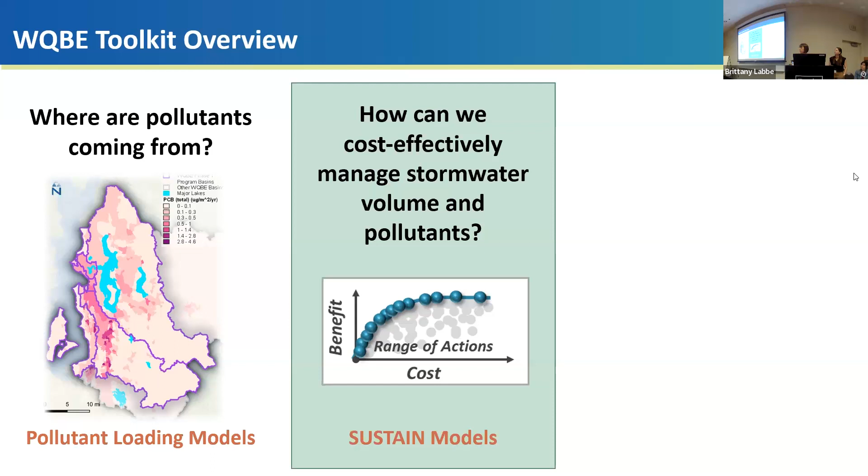And then we are looking to connect the possible actions we could take to the outcomes we could expect for people, salmon, and orca. So we have causal models, basically the cause and effect models that are helping look at what are all the different factors that are affecting how people interact with water. So are swimming beaches open? Can people safely harvest shellfish? Can they safely eat fish from our waterways? And then also looking at how water quality issues feed into the larger threats that are facing southern resident orcas and our Chinook salmon.

Today, we're going to really be focusing on the stormwater models. So you're really going to hear us talking about SUSTAIN today. And one of the key things about SUSTAIN is it's kind of different than the previous talks we had. They're getting really on the ground, where you can know a lot about your site, really dig in deep. This is trying to do higher level planning, and King County is really vast.

And so we're trying to, at a high level, look at what sort of goals can we set for our stormwater management? Can we estimate the outcomes we could get from a larger scale stormwater program, estimate what the costs would be, and then start to drill into informing the specific actions we would take on the ground. But it is higher level planning work that we're doing. And I'm going to pass it over to Stephanie to talk more about it.

Thanks. All right, thank you. Can everybody hear me okay? If I don't use a microphone? Okay. I'm going to set this right here.

All right, show of hands, has anybody heard of SUSTAIN before or used SUSTAIN before? Knows what it is?

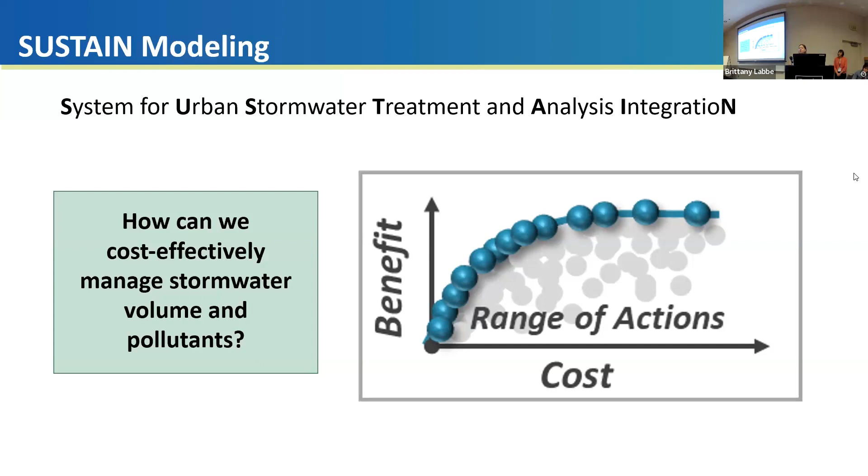So Sustain has been around since about 2014, stands for the System for Urban Stormwater Treatment and Analysis Integration. It was developed by or with the EPA, and it really answers the question, how can we cost effectively manage stormwater volume and pollutants? So a cost benefit analysis almost. And cost is something we're all probably pretty worried about.

And I want to talk a little bit about what goes into Sustain. How did we build the Sustain model for King County? The building blocks for Sustain are what we call actions or stormwater BMPs. I'm going to use the terms interchangeably. And so we have each of these actions or BMPs that we've developed. We've got green stormwater infrastructure BMPs, like rain gardens, there's gray infrastructure, as well as regional stormwater parks.

And each one of the BMPs that we've developed for our modeling purposes has three components to it. So design, cost, and performance. So performance is, what sort of pollutant reduction do we expect out of this type of BMP? And then cost. So we're looking at a 30-year life cycle cost. What does it cost to put it in the ground and maintain it for 30 years? And then also design, how big is it? And we're looking at a retrofit situation, right? So what are the sizes of the BMPs that we're talking about putting in?

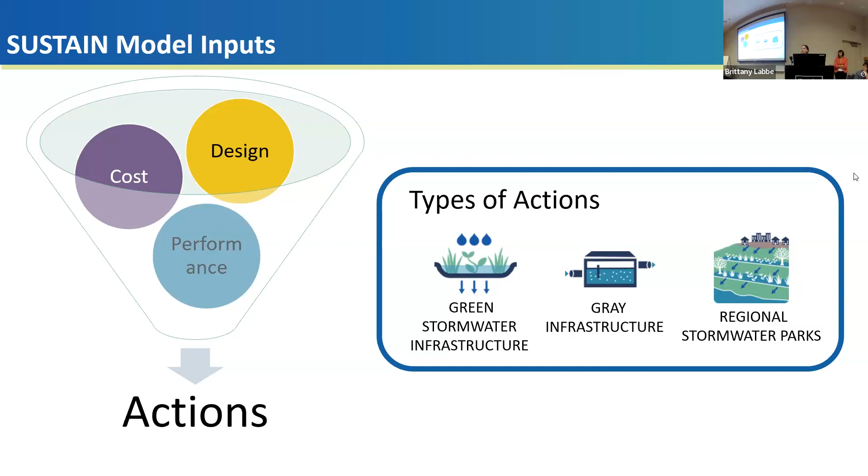And so all of these actions fit into one of three categories that we call programs. We have a GSI Green Stormwater Infrastructure Incentives Program. We have a Roadway Stormwater Treatment Program and a Regional Stormwater Treatment Program. So these three different programs. And the programs have a set of assumptions about them as well. So there's action opportunity. Where can we put the type of BMPs that we're talking about? So for example, in our GSI Incentives program, we have rain gardens. And in our model, we said rain gardens can only go in low density residential areas.

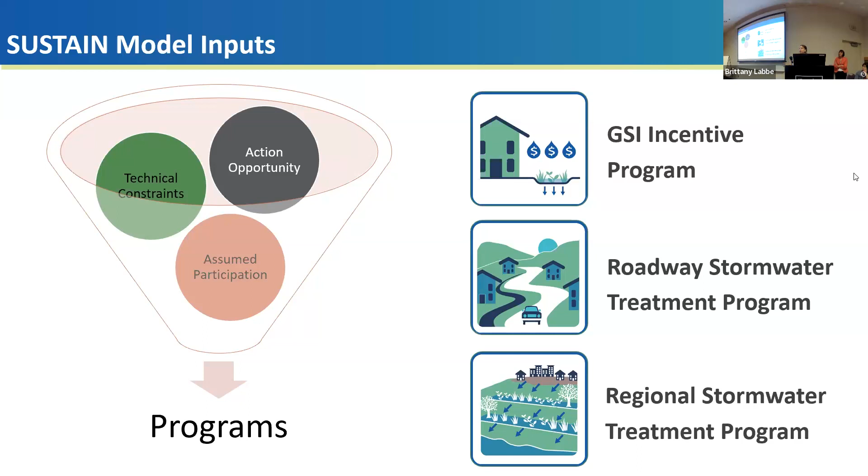And then we also have technical constraints. For example, for our roadway treatment program, we might not have space for some of the different actions that we're talking about, and we have to take that into consideration too. And another really important part of each of these programs is assumed participation, right? So if we go back to the rain gardens, we know that not everybody is going to want to put in or maintain a rain garden on their property. Or if we're looking at a regional stormwater treatment program and we want to put it on private land, people might not want to sell their property to us. So those are all considerations that go into the Sustain modeling.

All right, and so this graph looks kind of confusing at first. So I'm going to walk you through how to read it, but this is a Sustain curve or a cost effectiveness curve. This is for the Green Duwamish Basin. It's the roadway treatment program. We've optimized the model for sediment reduction. So we're looking at % reduction of TSS along the x-axis here along the bottom. So you can see we go from 0 to about 2.2%.

On this y-axis on the right, we're looking at capacity in acre feet, and that corresponds to these color blocks right here. And then finally on the left y-axis, sorry, we're getting it backwards, that's cost, and the cost corresponds to this red line right here. So these color blocks correspond to different BMPs that match to the capacity axis. So we can see bioretention in this teal color, media filter drain in this darker blue color. So that's how you read a graph like this. You can also see a handful, it might not be super clear, of other actions that are sort of lumped in the top right there, like high rate underground filter and bioretention planter as well.

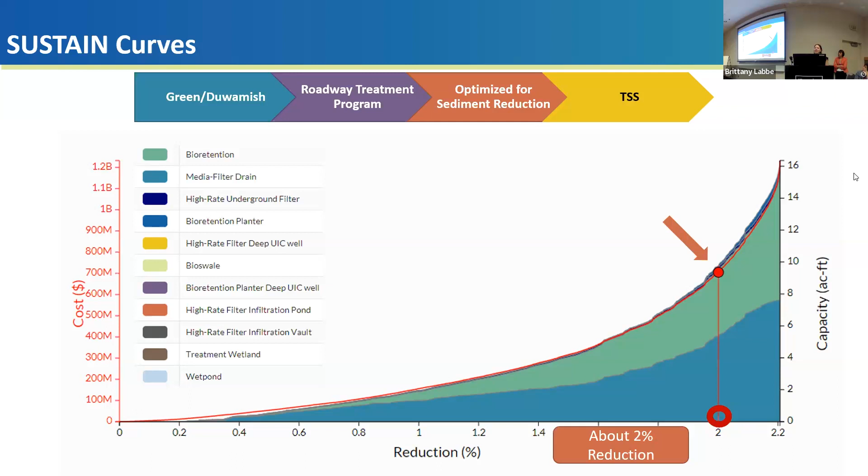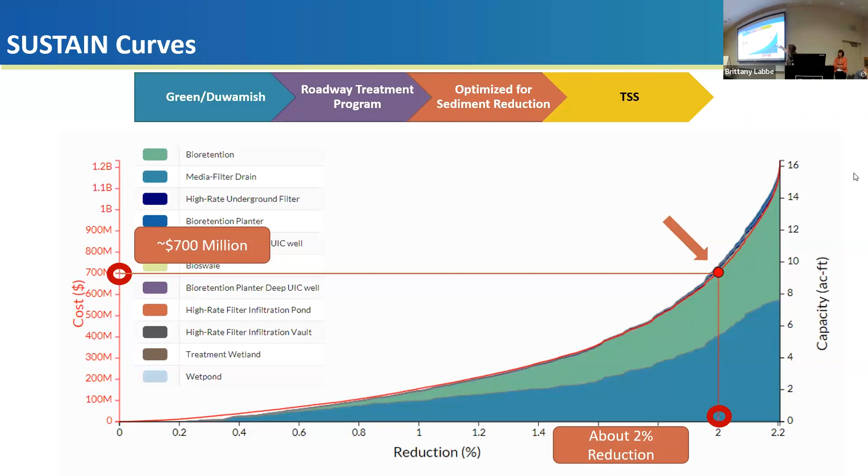And so with Sustain, one of the things that you do is we take what's called a slice or a package. So we can pick a point along this cost curve, and we can see that if we go straight down to the x-axis, at this point we get about a 2% reduction in TSS for the entire Green Duwamish Basin. And then if we look along to the cost axis, we can see that this would cost about $700 million in the Green Duwamish to implement this program. And by implement this program, I mean all this amount of media filter drain, this amount of bioretention, as well as these other little slices up at the top that are a little bit more difficult to see.

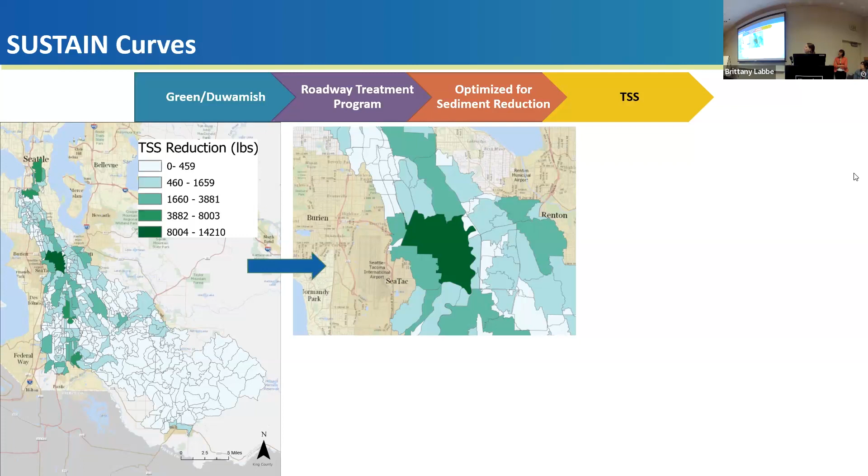So this is a heat map of TSS reduction for this specific package. And we can zoom in a little bit and we can see, maybe we're trying to prioritize our projects, or where do we start if we want to hit this goal. And I might zoom in on this darker green sub-watershed.

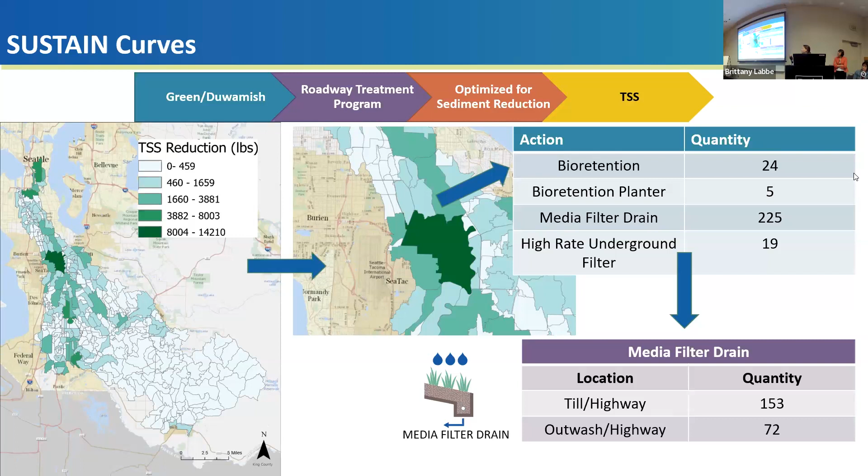And in that sub-watershed, Sustain is telling us to get this reduction that we're looking for this entire 2% program in the Green Duwamish, we would need 24 bioretention actions and 5 bioretention planters, and then 225 media filter drains. And so we can even break that down a little bit further and look at almost where, so it doesn't site the actions, but what it does tell you is these are most effective near highways and till soil, for example.

All right. So from our Sustain modeling, we modeled these 3 different programs across 5 basins in King County. So all the basins with major receiving waters in King County. And looking at all the programs across all the basins, there were 3 key takeaways or main findings that we had. The first is that the regional stormwater parks are worth the investment. And again, with that whole cost thing, that's sort of a scary statement.

And this is the Manchester facility in Kitsap County, and you can see it's a really nice green open space. So we've started calling them stormwater parks instead of stormwater facilities, because facility sounds not as cool as this picture looks. And so this is the Sustain curve for the regional facilities program. Again, it's the Green Duwamish. We've optimized it for sediment reduction. And you can see that for about $500 million, we can get a 42% reduction in TSS.

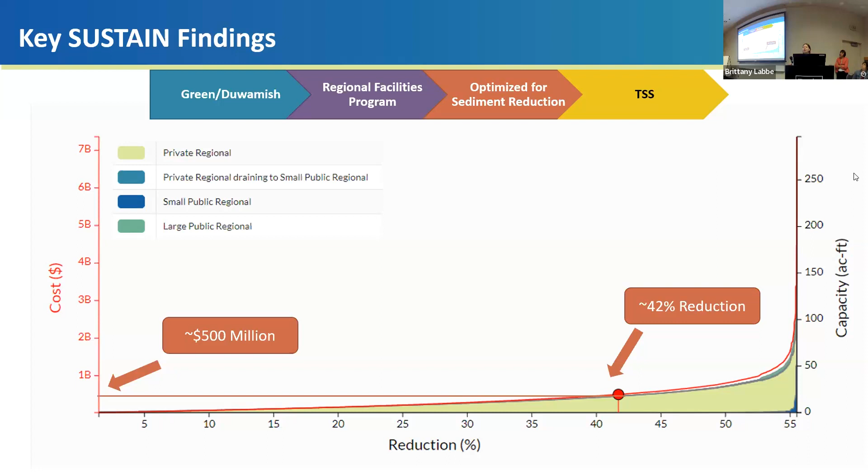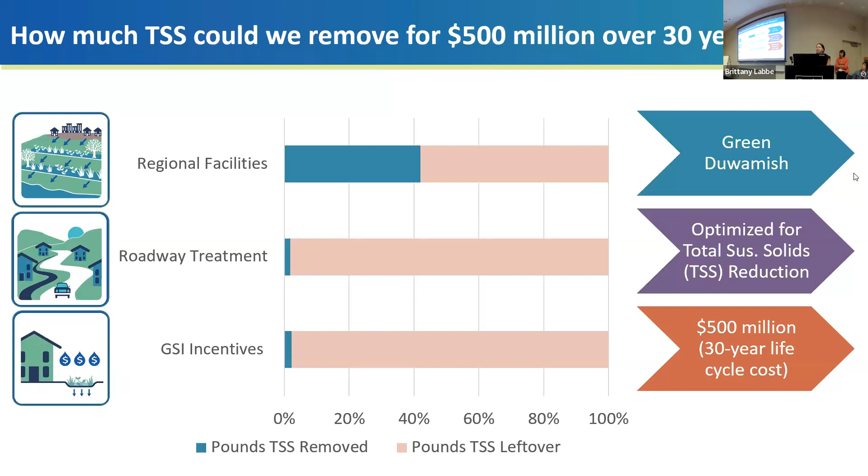And if you remember back to what I was talking about with the Roadway Treatment program, for $700 million, we could get a 2% reduction. So this is an order of magnitude larger. And so again, just comparing across the programs for this $500 million package, what is the percent reduction that we get? Regional facilities is over 40%, and Roadway Treatment and GSI Incentives are less than 10% each. And this is a pretty significant finding, and we were surprised by it.

So with that, I wanted to talk about some limitations. So we haven't looked at flow control yet. This is just for water quality, and we acknowledge that flow control might look different if that's a big priority. When we did this modeling, we initially only looked at public facilities, and we found that that wasn't really hitting the mark. So it's really important where we're siting these regional stormwater facilities. They have to be at the bottom of the sub-watershed or the bottom of the catchment to be really effective.

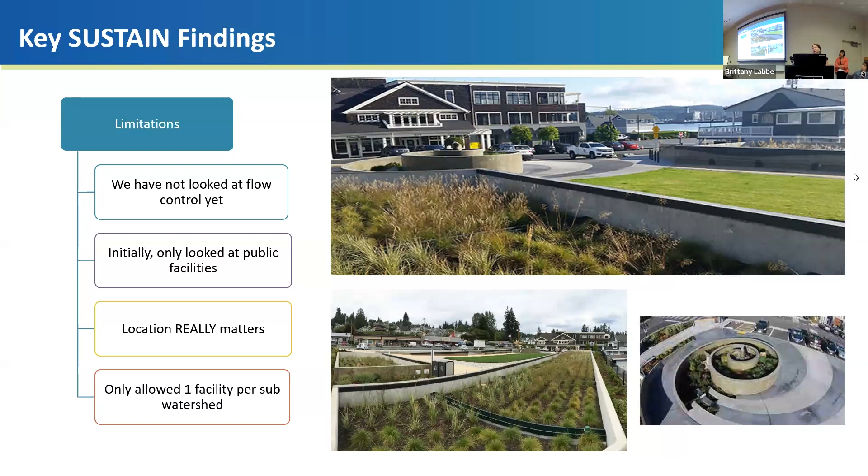And in fact, these facilities are so effective, Sustain wanted us initially to put multiple in one sub-watershed or one catchment. And we realized that's probably not feasible. It's hard enough to site these as it is. So we limited it, in our modeling, to one facility or one park per sub-watershed. So these are just some modeling constraints that we wanted to make sure you're aware of.

Key finding number 2 is that model assumptions and opportunity constraints really matter. Anybody who's a modeler knows that, but there's something really interesting about this GSI Incentives program that I want to point out: we get a really low, less than 5% TSS reduction in the Green Duwamish, but we assumed really low participation, or what we call a realistic participation value. And so we assumed that not a lot of people would want to put this on their property or maintain it over a long period of time.

And so if we change this number to 100% participation and everybody participates, we get over a 10% reduction in TSS. And that's a more impressive number. So it probably really depends on your community, and assumptions like that really matter when it comes to stormwater modeling.

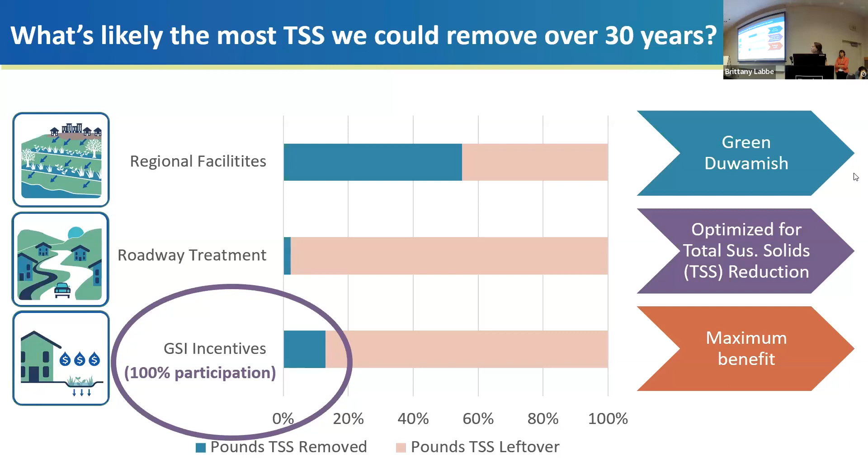Key finding number 3 is don't forget about co-benefits. And here's what we mean by that. These regional stormwater facilities should really go at the bottom of a watershed or the bottom of a sub-catchment. And that's great, right? You're able to treat everything downstream. But what about upstream, right? There's fish upstream, there's people upstream, there's communities upstream. And if the water quality is lower upstream, that still matters to us.

So we know that it's important, even though it might not be what the model says is the most cost-effective thing to do, to have roadway treatment and to have GSI programs spread throughout your watershed or throughout your catchment, because that matters to hitting our goals, right? If we're concerned about people, salmon, and orca, then we can't just be letting all the dirty water go to the bottom and then treating it there. And so we are also really interested in this upstream benefit.

And I'm going to turn it back over to Carly here. All right. I'm not confident I'm as loud as Stephanie can be, so I'm gonna use the microphone again.

So I just wanted to bring it back to talk a little bit about how this gets used. So Stephanie shared those key 3 pieces, and I had described before that this goes back into a larger decision-making framework, right? Like Stephanie was describing, we can't just take what the model says. The model is optimizing specifically to what you tell it to optimize to. So if we're optimizing to TSS reduction, it is telling you this is the most cost-effective thing you could do to get the most TSS reduction, but we know that we have a suite of things that we care about that is not just TSS reduction.

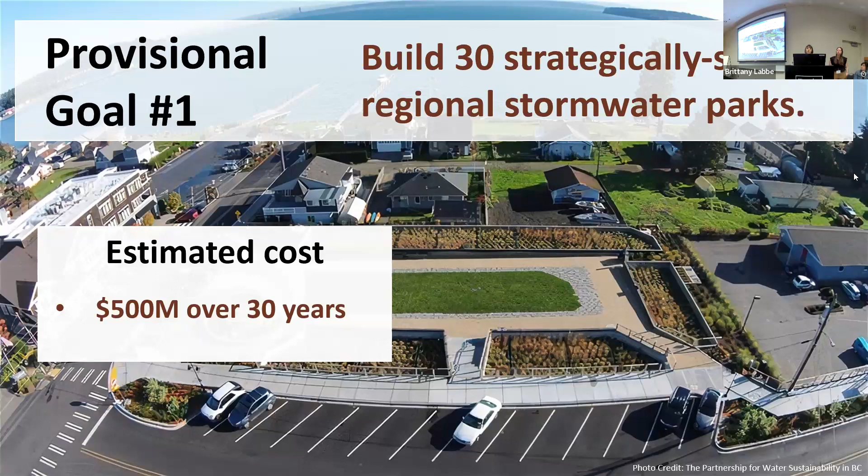We are going to be updating our costs because, as we were hearing in the previous talk, the costs are going up, and these are 2019 dollars, so we will be looking at that. But roughly 500 million over 30 years. That's to build and maintain 30 regional stormwater parks. We can also think about the outcomes that we could get for that. So if you were really to site these in a way that you could route a good amount of water from your local watersheds, you could treat 7 billion gallons of stormwater each year and remove 40% of the PCBs in those local watersheds where they are sited. So that can help really galvanize why these would be so important. And even though it can be a hard lift, really help push why that would be worth the investment.

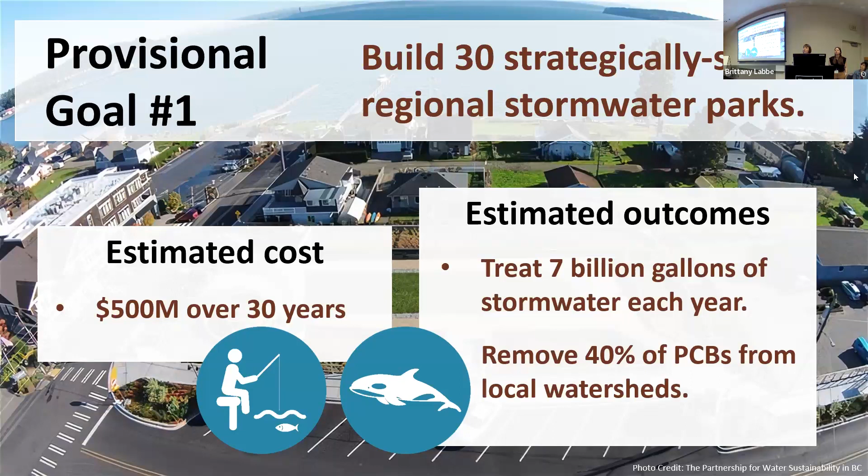Oh, I was going to say, bringing back in those causal models that I haven't talked about, we can look at, if we have 40% PCB reduction in these local waterways, what would that mean for really improving safety? PCBs are important for people eating fish. We have fish consumption advisories across King County for PCBs. So how close are we getting to people being able to more safely eat fish in the county? And they're also important contaminants for our southern resident orca.

So some things that are coming up: we are going to be updating our website in the next couple months to share out some of these findings so they're easier to find, and to be able to contact us easier. We want to share the data behind this if you're interested in dialing into a particular area in your jurisdiction, for instance, and see what Sustain was saying was really cost effective for these 3 programs for TSS reduction. That's something we have available now. We'd be happy to meet with you and we can actually go up and down on those curves and look at what Sustain is saying would be really cost effective in your area.

We're also starting to model flow control. So that was something that's missing so far. We're going to be looking at optimizing flow control over this year and next year. And then into the future, we plan to maintain these models. We want these to be useful to the region in the future. So we're going to be incorporating climate change directly into the models in 2025. And then beyond that, we're really interested in partnering to use these for new analyses over time.

With that, we have so many people who have helped work on this project. I think we're available for questions. Thank you both. Any questions?

I have a question about how you're organized in your municipality. Who runs the model? Who owns the model? How do you get the data? How do you fund those things? Okay, so a question of how King County is organized for funding this work and maintaining this work.